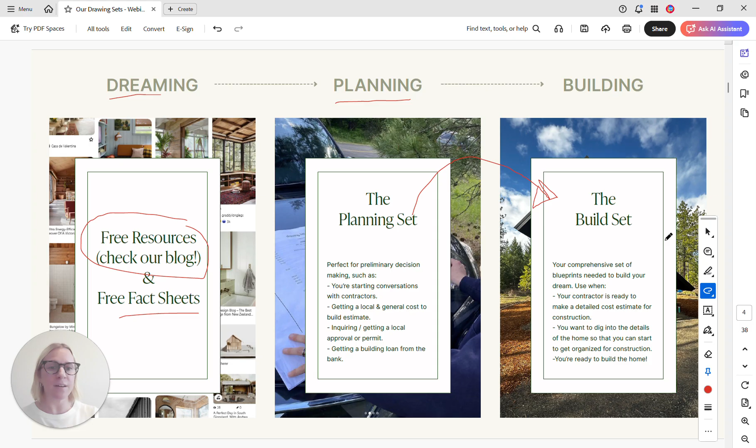Then when you are actually ready to build, we have the build set, and that's what we're going to be reviewing today. This is your comprehensive set of blueprints, the full set of drawings you need when your contractor is ready to make a detailed cost estimate. You want to really look at the numbers and fine-tune those, dig into the details of the home so you can start to get organized for construction and when you're ready to build the home. So let's dive in. What is included in the build set?

As a brief and general overview of what's included in this full build set package, our first one, which is the biggest one, is those architectural drawings. Those are created by us, and that's what we're going to be reviewing today in detail.

We also now provide 2 hours of customizations through our design studio. We work one-on-one with you to tweak the design for anything that you'd like. You can move windows, you can move doors, we can take a look at maybe a different layout for your bathroom, anything that might serve you better and serve your land better potentially, and whatever you need.

You also will receive structural drawings. These are done by a professional engineer, and they can also help down the road if you need the structural drawings stamped, if you want to review the structural drawings for your site. Potentially you have a higher snow load or wind load, they can update those drawings for you.

You'll also get an interior package from us. This is basically a full spreadsheet of interior finishes that have been selected and designed by us, and you get all of those links and recommendations from us for certain rooms in the house.

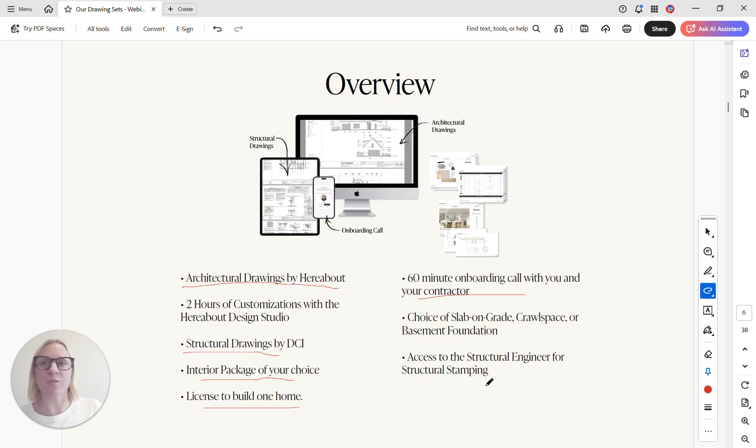All right, let's dive into a full set of drawings. On our cover sheet, this is kind of the title page of the book, may we say. And we're going to be looking at the Hangout V3. This is the slab on grade foundation.

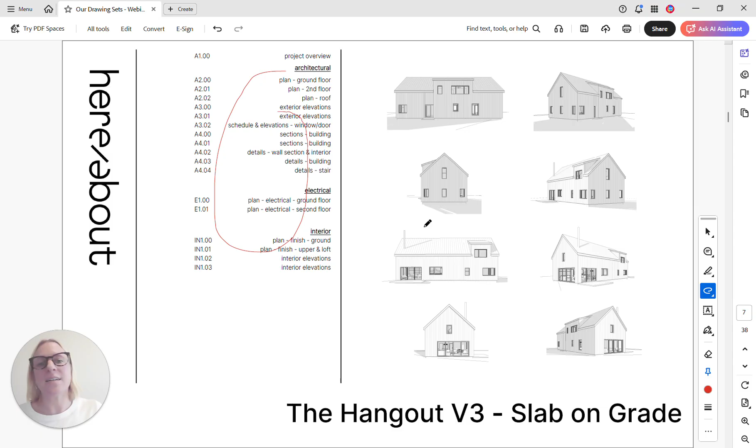So first we're looking at the full list of drawings. We see some nice 3D views of the house. This is our details and note sheet. And then we start to get into the drawings.

So on our floor plans, I love to call the floor plans our treasure map of the drawing set. It's kind of giving us the layout of the land for this home. So we're seeing all of the walls, all of the doors, all of the windows locations, what are all of our room names, and then we're starting to see really detailed construction dimensions for where all of those things are located.

The treasure map of things of sorts is we have all of these keys that kind of point you in the direction of some other drawing within the set. So here we're seeing section cuts, and this will bring us to another page. This section cut is, we're cutting through this home, standing in the center, looking this way because our arrow is pointing this way, and we're going to see a 2D cut through that house at that point, and we'll get to that drawing in a bit.

Also on our floor plans, we're seeing location of plumbing and appliances, and a bunch of notes that describe other items in the design. So now we're going to the upper level of the house, and then we're getting to our roof plan, which is now describing the slope of the roofs, our overhangs, and maybe what different truss profiles we have.

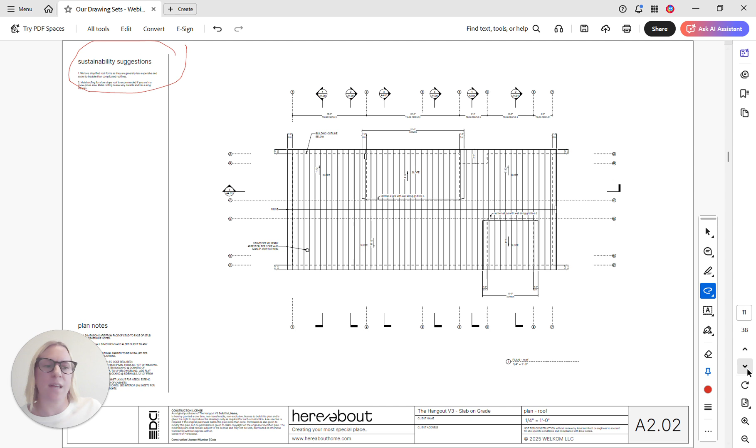On all of our drawings, we also like to suggest any additional sustainability measures that you could take. Anything like that is optional, but sometimes people like to know where they could and maybe want to do more. And those are nice, small suggestions that we have included in each page.

Our exterior elevations, we start to see those same door and window tags that we saw on our floor plan. And so you're starting to kind of connect the dots of where all of these things are located and on which elevation. We have keynotes for all of our exterior finishes.

So for example, we have a keynote here saying it's keynote D, and we see siding here. So we're not telling you use this type of siding, we're just suggesting this vertical siding here if you want. A lot of people change it up though and do something differently. So it's flexible enough for you to put your own personality and your own spin on it. And we're always here for questions and opinions if you want our opinion on what you should select.

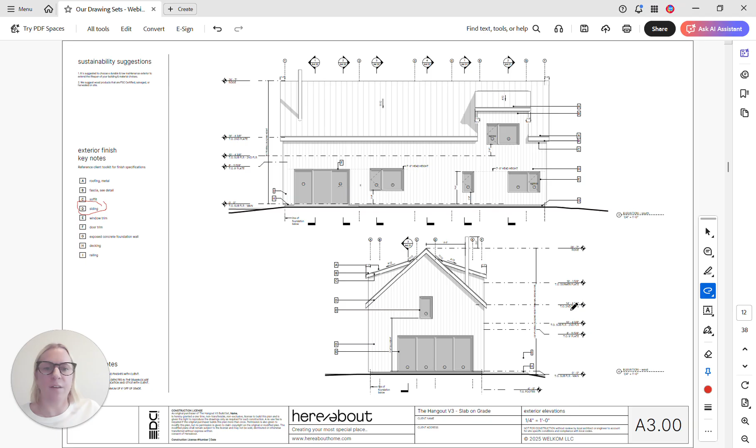So we're looking here, we see the height and location of all of the windows and doors, and slope of all of our roofs, and kind of how everything is looking in elevation. Overall building heights and floor heights we also see, and then which windows kind of are egress windows as well.

Now we are coming right into our window and door schedules, so we are looking at all of these windows, all of these doors, the schedule for all of those, including the height, the width, our door and window details.

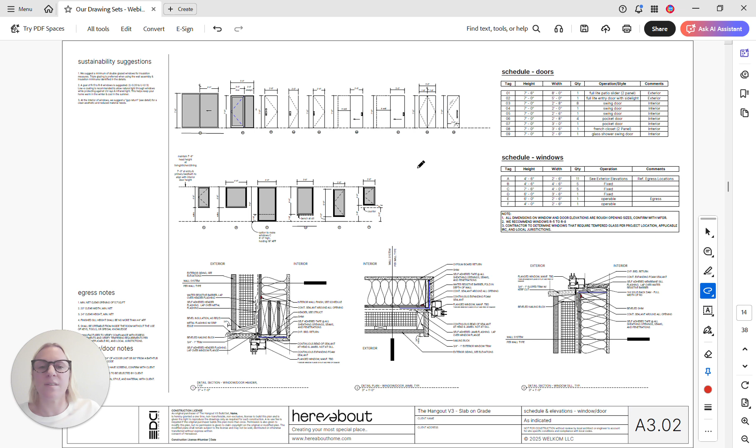And then we move into those section cuts that I had mentioned before in the floor plan. So standing right in that living room looking directly towards that exterior gable wall, we see what's that shape of the space inside, how high is everything. We're pulling dimensions for all of that and explaining the truss profiles as you see them kind of move through the house here. This one's starting to develop that dormer.

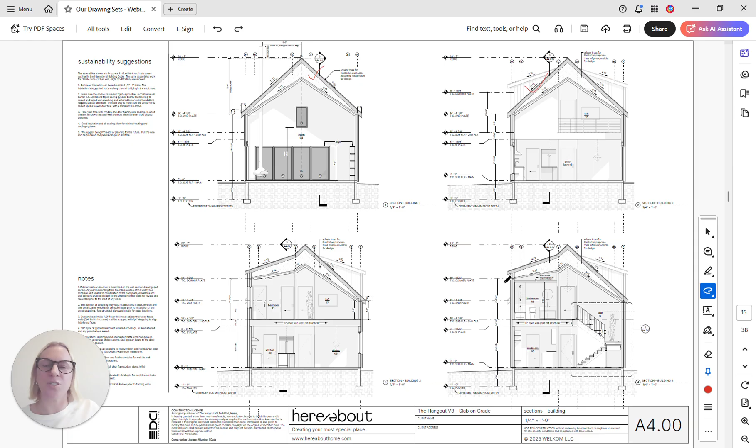And then like what is our floor makeup and what are those connections between all of these things. You can see our stairs. So we like to take a section cut kind of through each different connection in the house or each different scenario in the house. You can see in this one, as you come in, this is our space above the bridge. So you come in and you look up and you can see the bridge and there's that nice connection there.

Different dormers and then our long section through the house. We now start to get more detailed and more detailed. So when we back up, we see our sections, kind of that's our biggest picture, and now we're going to go more detailed, finer and finer detail.

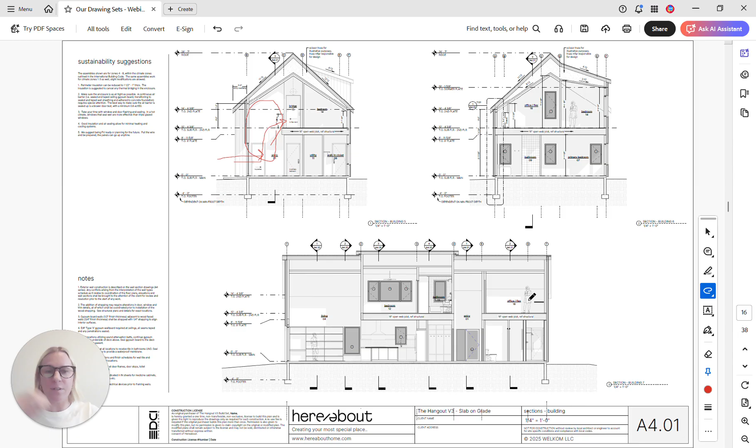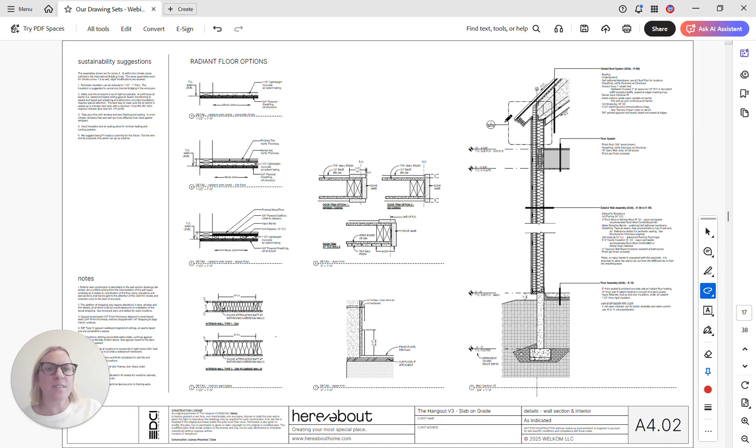So we have some interior details that we like to include. This is a nice big wall section, and this is a great overview for what that roof assembly is, the roof makeup with our truss, roof, and any insulation. Same with our overall wall assembly and floor or foundation assembly. And then we're calling out different areas and zooming even closer into those so we can really understand what all of those connections are.

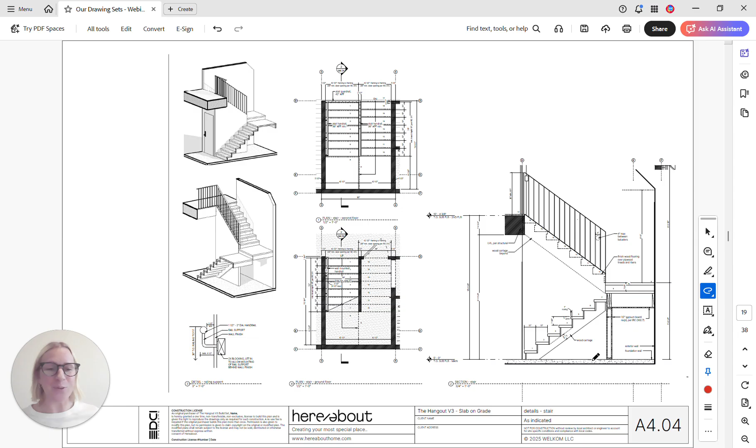We get into our stair details here, which are really important for understanding how to create the stairs to get from one floor to the next. So lots of details, dimensions, and notes to provide your builder with the appropriate communication to build the stairs. And these 3D views I think are super helpful to understand where those railings start and stop.

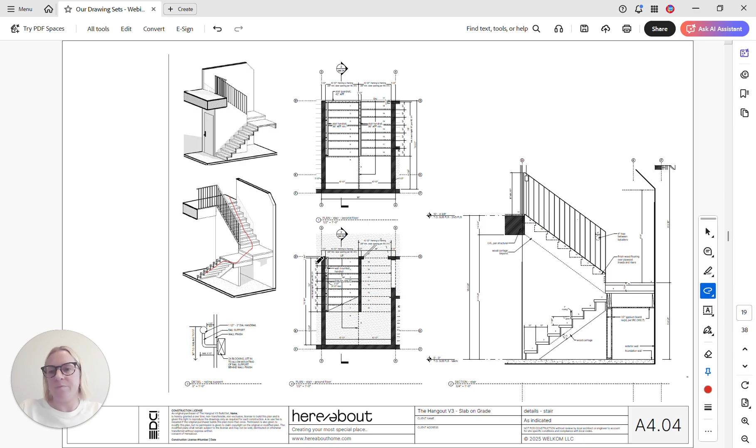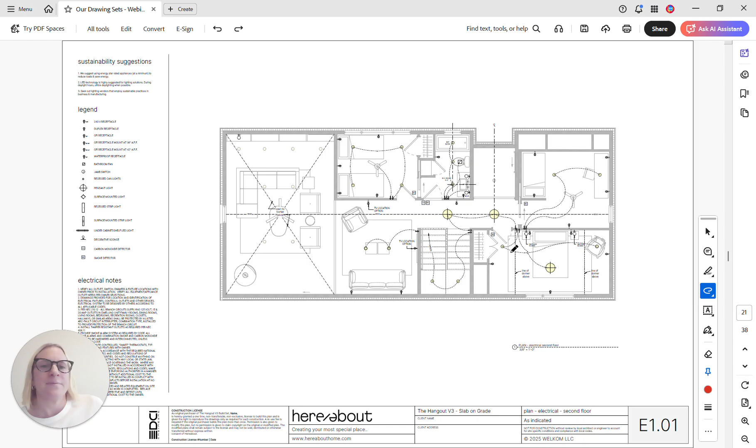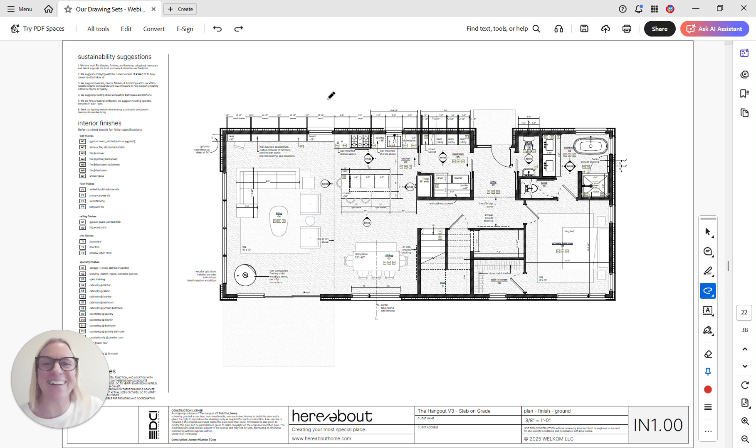I'm going to zoom in a little to give you a better sense of some things here, but this is really nice to see. We're pulling all of these dimensions for the cabinetry too. This is just a first pass of suggesting, like if we were to build this house, this is how we would set the cabinetry up.

But what you can do is take this page of drawings, and what's coming up next is these interior elevations where we're starting to see this cabinetry in elevation form. Take that to your cabinet maker, and this is a really good first starting point of, hey, this is the space we have to work with. This is the cabinetry that's suggested, but maybe I'd really like doors on either side of my oven rather than drawers. That's something we can help with within those two hours of customizations, or if you want to work with us further on that.

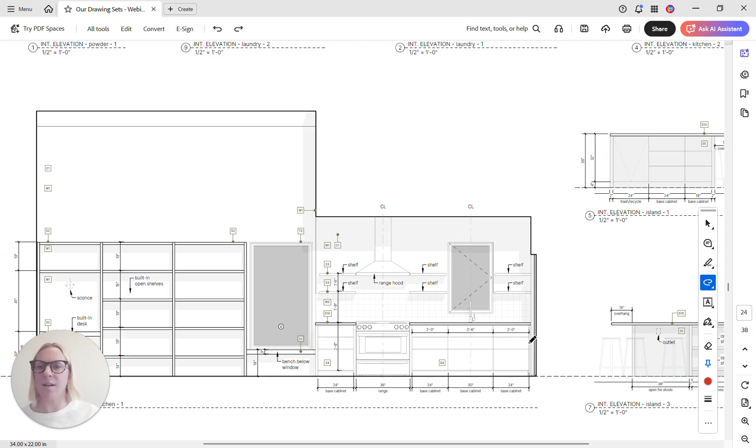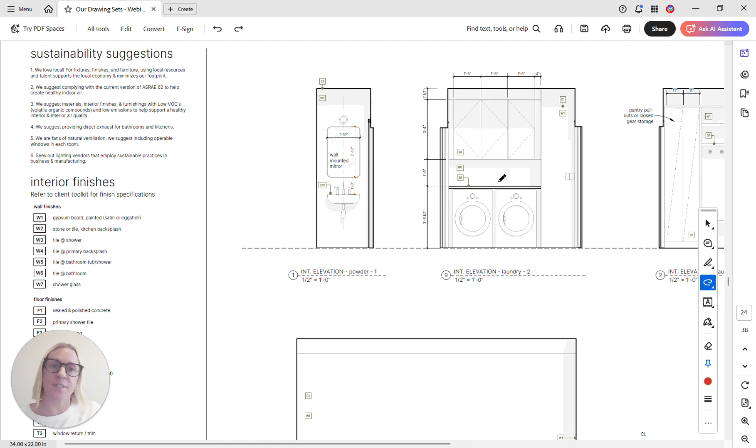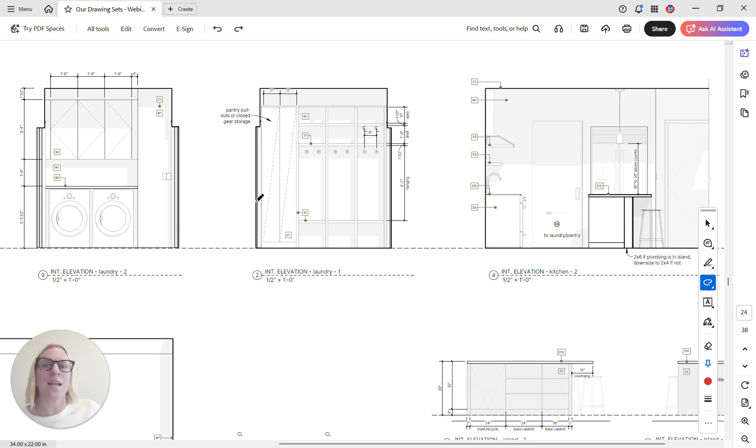As we get into these interior elevations, it's really nice to see in each of these smaller space, high-touch rooms, bathrooms and kitchens, anywhere there's cabinetry, we'll pull an interior elevation for you. So you're starting to see those finish tags appear again, showing you that this is another set of cabinetry you'll have to select a finish for or match to something else. But we're also showing the size of the mirrors, how high our sconces are suggested to hang, how high these pendants are suggested to hang off the countertop, a nice layout for that mudroom and possible pantry space, these nice built-in shelves.

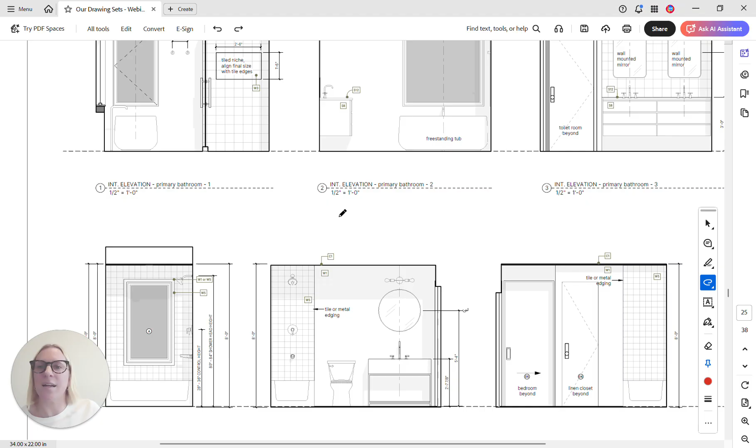Dimensioned and detailed, our island, and then we get into the bathrooms. At the primary bathroom, even showing if you want to put a niche in for all of your products, this is how and where we would suggest doing it. And all of those other dimensions, just a stab at the drawings to get you started.

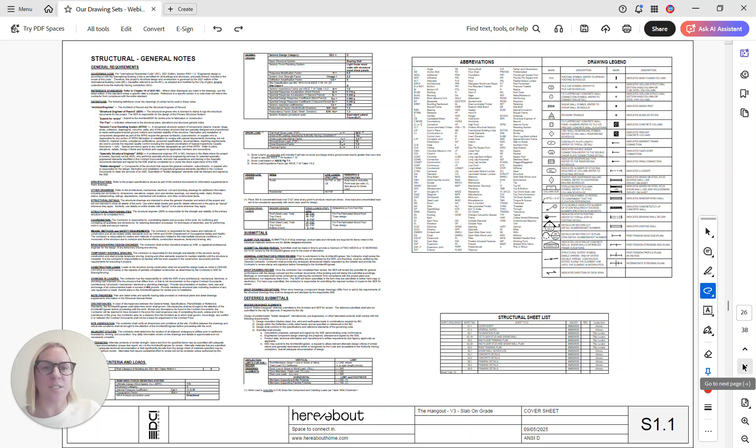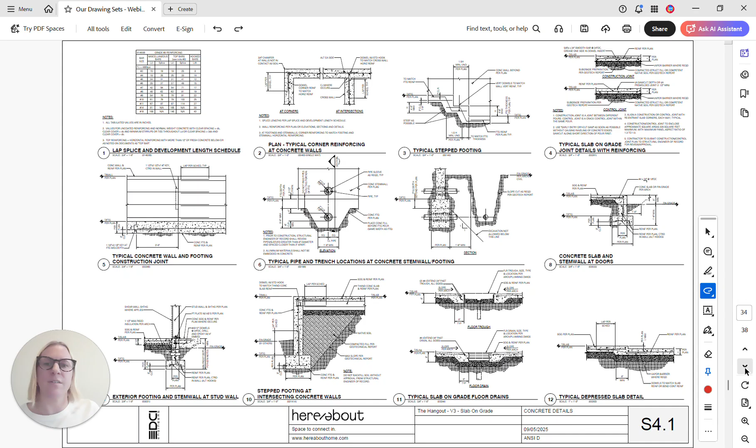So that finishes out the architectural set, and then we move into the structural drawings, which are completed by the structural engineer that we work with. These provide a foundation plan, first floor stud and shear wall plan, going up to our framing plans, second floor roof framing plans, and then all of these structural details that are super important for understanding some of the connections required in the house.